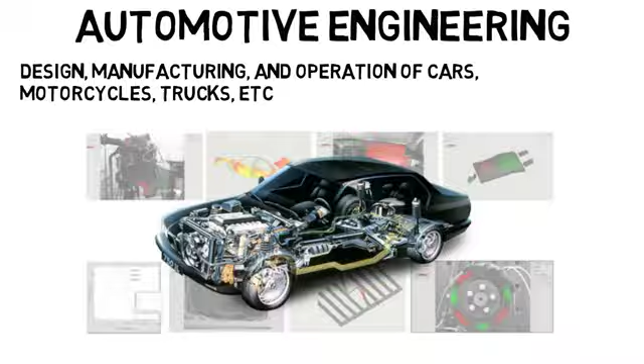Automotive engineering is about the design, manufacturing, and operation of cars, motorcycles, trucks, and other automobiles. There are a lot of subdisciplines within automotive engineering, and many things you can work on. For example, you could work on the safety aspect, assessing various crash scenarios, whether on the computer or doing actual crash testing.

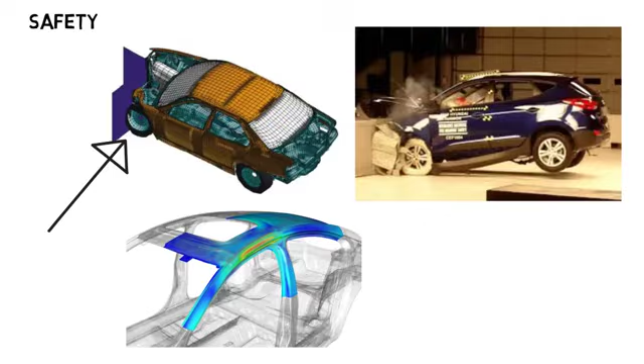Cars need to meet certain standards to protect the driver and passengers. The frame of the car has to be designed properly so that energy from a crash is absorbed or moved away from the driver. Cars are meant to crumple in an accident, as engineers design them that way to save lives of the people inside. If the car was extremely strong and no damage was done to it, all that energy would be transferred to the people inside.

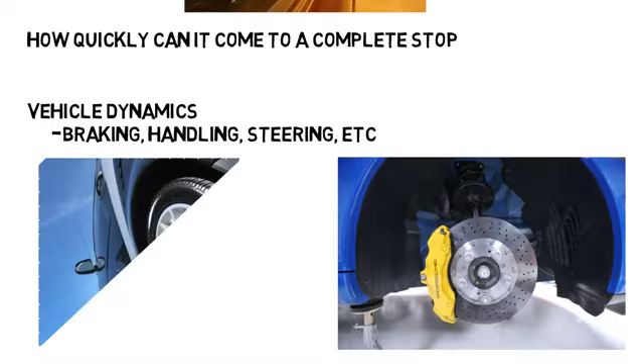There's performance, analyzing how fast the car can accelerate, how quickly it can come to a complete stop, and more. There's vehicle dynamics, looking at things like braking, handling, and steering and how the vehicle will respond. The engineer who works on this would analyze or design the braking, tires and wheels, suspension, the frame as well, and more.

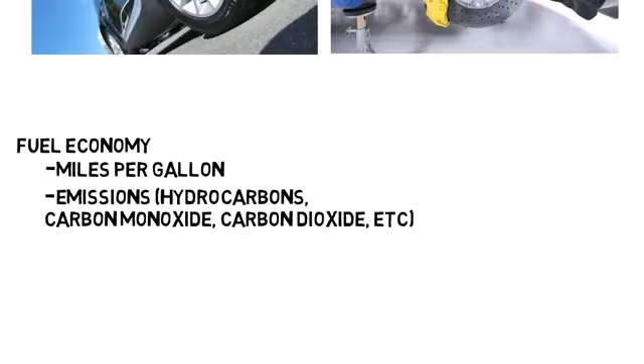There's fuel economy, where you look at fuel efficiency in miles per gallon and test car emissions such as hydrocarbons, carbon monoxide, carbon dioxide, and so on. But of course this wouldn't apply to electric vehicles. There's shift quality, focusing more on the transmission, durability of the car, electronics, and much more. Overall, just note there are many components to a vehicle.

Common jobs would be designing on the computer, testing, and actually working with a physical vehicle, or even manufacturing, where you help with the making of the vehicle and its components.

Now when it comes to college, automotive engineering is rarely offered as a major, at least for undergrad. The most common major to go into is mechanical engineering, and then you would pursue careers in the automotive industry, or get your master's and even PhD in automotive engineering.

But that's not the only option if you want to work on cars. Materials engineers can work on cars, electrical engineers can work on cars, especially with electric cars becoming a thing. Computer scientists are even needed for self-driving cars, to write the programs for the autopilot as an example. And there's even mechatronics, which may be its own major depending on your school, or just a subfield of mechanical engineering, but this can lead to working on car control systems and similar aspects.

And these are just to name a few. So you can work on cars through various majors, but mechanical is just the most common one people think of, and it also depends on which aspect of the vehicle you want to work on.

Now a huge area of research you probably all know of is self-driving cars. Companies like Tesla, Uber, Google, Toyota, Ford, General Motors, and more are all aiming to get self-driving cars out on the road. We do have self-driving cars right now, but there are restrictions to them, and at the moment we are still waiting for a fully autonomous vehicle available to consumers.

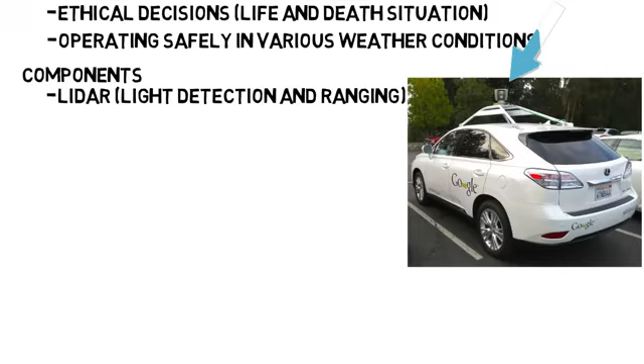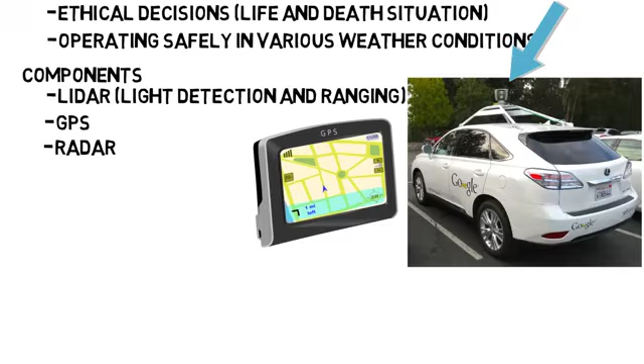Just to name a few, there's the LiDAR, or light detection and ranging, which basically uses light to detect surroundings, and is what you see on top of the Google car here as an example. There's GPS, which the car uses to navigate to its destination and know where you are. There's the radar system, also used to map out the surroundings, but using lower frequency waves than light, or what the LiDAR uses. And this has its advantages; as one example, LiDAR will not work with heavy fog, whereas radar will.

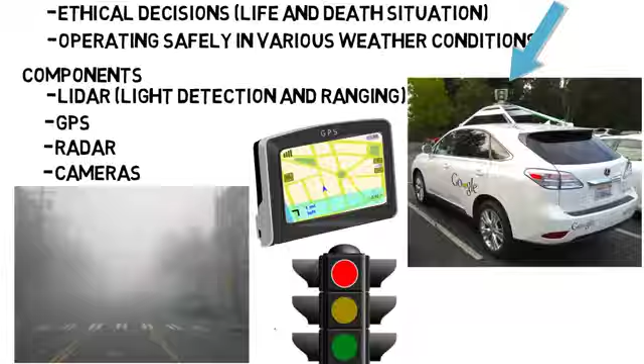And then there's cameras, which read the road and the surroundings as well, but they can also read traffic lights. Research is going into putting these together with even more components to make a safe self-driving car. But even though self-driving cars seem to be the main thing happening, other aspects of cars are also trying to be optimized.

Take the new Audi A8 suspension. This new suspension system incorporates an electric motor for each individual wheel. There's a camera on the front that reads the road and detects bumps so the air suspension can coincide with those bumps, and with those precise reactions, you can nearly eliminate vibrations. Working with the camera and transmission of data could be done by an electrical or computer engineer, but the suspension system itself and doing tests on vibration would be something a mechanical engineer would do.

There's research going on into materials that aim to make lighter but safer cars, and this may involve looking at different types of metals that have different properties like varying strength and density. A lot of the metals in cars today did not exist just 15 years ago, and we are still continuing to make advancements in this area.

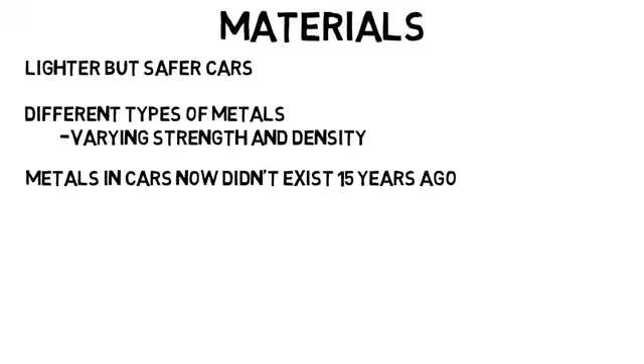Now, just to show again how much there is to work on, I found a Forbes article that I linked below titled, 'What Will Mechanical Engineers Do After Most Cars Go Electric?' Which is a fair question because electric cars don't have an internal combustion engine, so are mechanical engineers still needed? Well, of course they are.

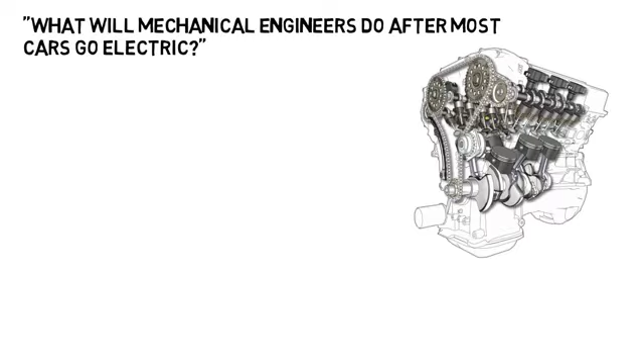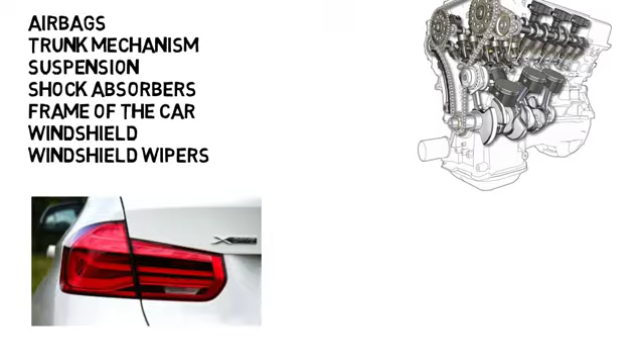Even though mechanical engineers do work on engines, most of them work on other stuff. Think about what a car really has: the airbag, the trunk mechanism, the suspension, shock absorbers, the frame of the car, the windshield, and even the windshield wipers. Everything a car has, someone, usually multiple people, has to work on, design, test, and manufacture. The article even shows how even the plastic taillight cover had to be made accurately and economically so it could fit the car, and another engineer had to design the machine that makes that taillight. There's so much more detail than you may think about all the things we use. So yes, mechanical engineers are of course still needed.

Now when it comes to companies you want to work at, you may think of some typical ones like Honda, Toyota, Ford, Tesla, and so on. But there are also suppliers for these companies, and multiple articles state you might even do more of the cool design work at those places you probably haven't heard of.

For example, take Honda. A huge company everyone watching knows of. But do you think every single part of a Honda is made by them at their plants? Because they actually are not. Many other companies help with certain parts, and I'm sure most people haven't heard of the majority of these companies. According to Investopedia, AGC Automotive supplies Honda's windshields, Takata supplies their airbags, Borg-Warner supplies the automatic transmission systems, Automatic Spring Products supplies the seat components, and there are more. So even if you don't land the job at Honda or Toyota, just realize how many more companies there are that you can work at.

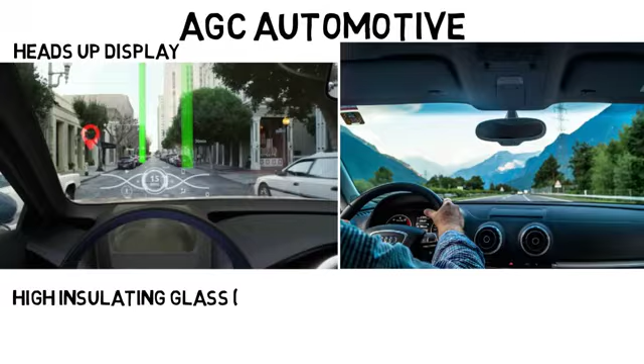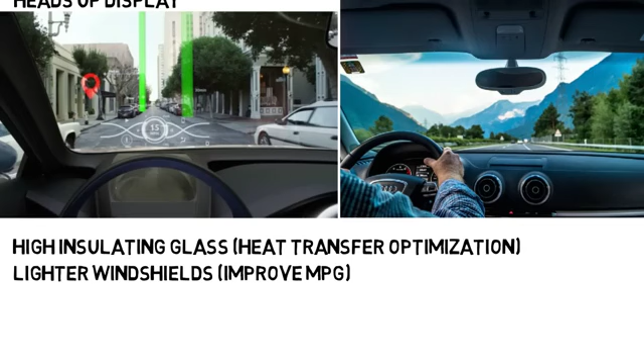Now something like windshields may not sound very exciting, but if you go to AGC Automotive's website, the company that supplies Honda's windshields, and look at their products, you'll see a lot of things. Things like heads-up displays on windshields, which display dashboard information on the windshield so drivers can stay focused on the road. There's high insulating glass for heat transfer optimization to maximize comfort. They're trying to make lighter windshields to help improve the car's MPG by reducing weight. And they're even working on glass where, with the press of a button, you can control how much light and heat comes in, which helps reduce the need for AC.

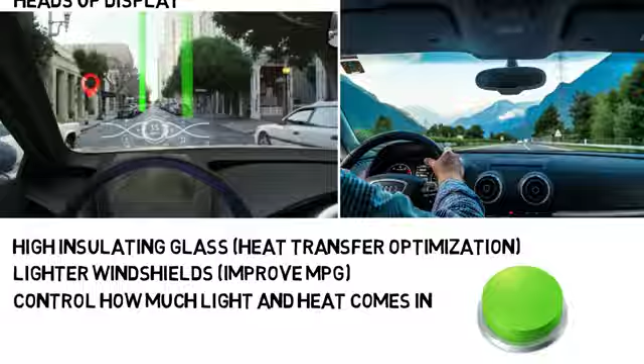So when people say they want to work on cars, just realize there's way more to it than you may think. You may help design the overall concept of a new vehicle, but you might instead help design the windshields, the suspension, the frame of the car, and various other specific aspects of these vehicles.